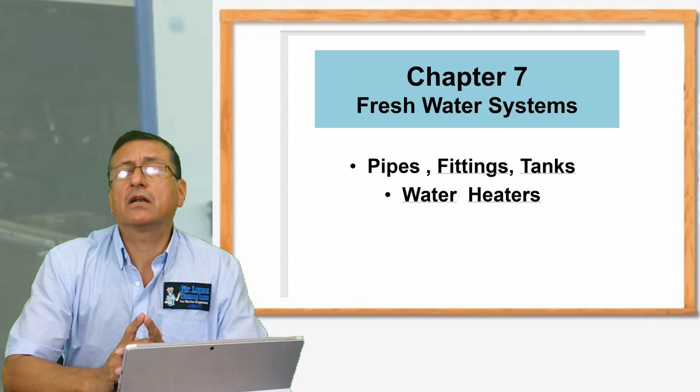Be careful with freshwater systems because people make a lot of mistakes in the installation. Normally people think this is pretty similar to residential home installations. It's similar, but it's not the same. We need special considerations, especially in relation to the quality of materials, the wiring, the bonding system, and the selection of materials appropriate for each specific situation. Take care, because the installation and the materials are completely different. Never use regular material, the material you use in your home installation.

Use always marine approved materials.

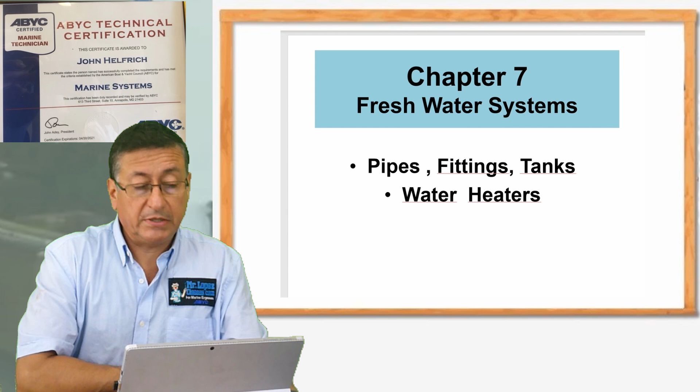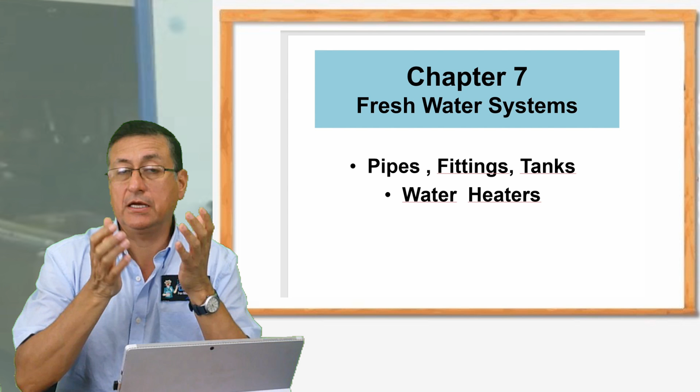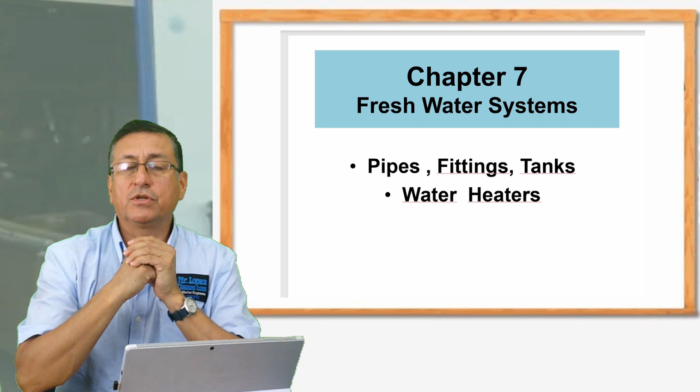My friends, in the installation of freshwater systems, it's common that people try to use materials meant for industrial and residential installations. Those materials are different. Be careful if you're working in a marina or shipyard, because you may receive a visit from the inspector, and suddenly he rejects your work for using improper materials. Always use recommended hoses, pipes, and clamps approved by the Coast Guard, ABYC, and the regulation in your country. In America, we follow ABYC. It's a good standard for installations of freshwater systems, sanitation systems, and all auxiliary systems.

Okay my friends, we are going to start with the pipes. The materials, once again, should be marine approved. The majority of pipes for freshwater systems, if metallic, are in a special bronze, marine bronze alloy, with fittings also in bronze alloys. If the lines are aluminum, it's aluminum series 5000, marine approved. If stainless steel, it's stainless steel series 300. Don't forget: series 300 for stainless steel, series 5000 for aluminum, and copper alloys only naval bronze and special bronze alloys allowed for marine applications.

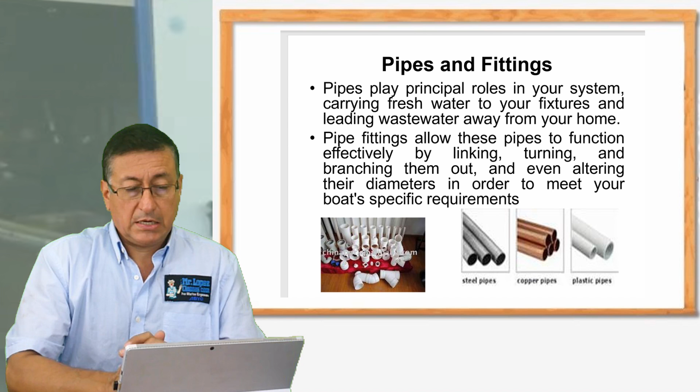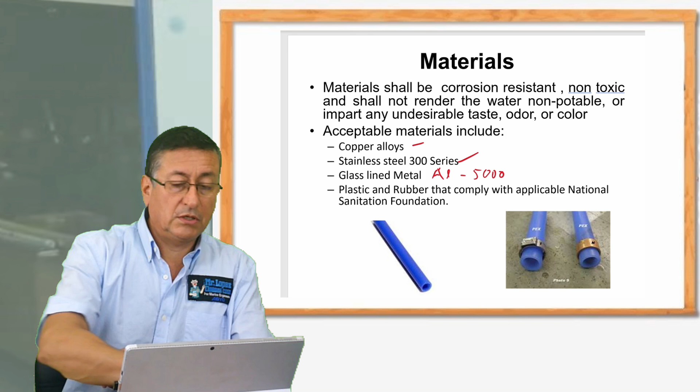Let me check the special materials once again: copper alloys, stainless steel series 300, aluminum 5000 series, and plastic and rubber according to the ABYC and Coast Guard regulations. That's critical, materials.

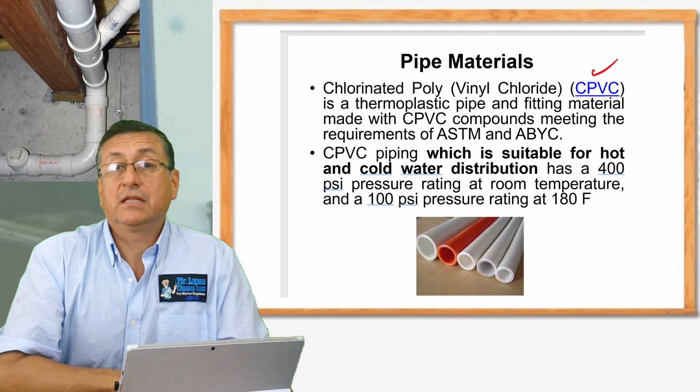CPVC is a good material, it's authorized, and those elements meet the requirements of ASTM and ABYC. That material is different than regular PVC. The regular industrial PVC is different from CPVC. It's chlorinated polyvinyl chloride, a special material approved by ABYC. CPVC piping is suitable for hot and cold water distribution, with a capacity of around 400 psi of pressure, and works in temperatures up to around 180 degrees Fahrenheit.

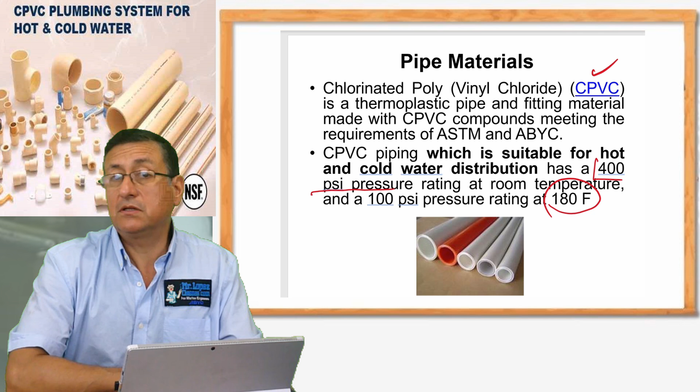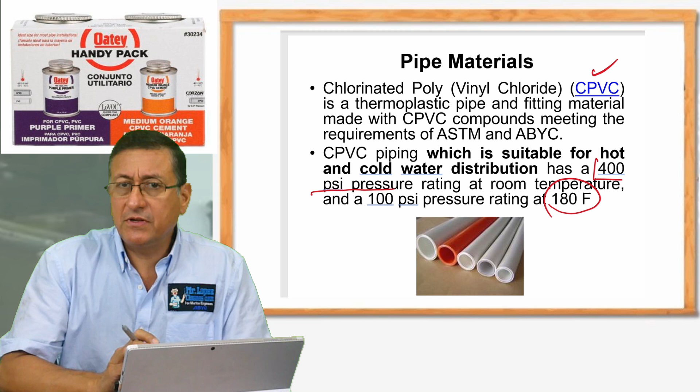CPVC should be installed with the special glue and the special cement for CPVC. It's simple, pretty similar to the residential application, but don't forget, regular PVC for residential application is not allowed in marine applications.

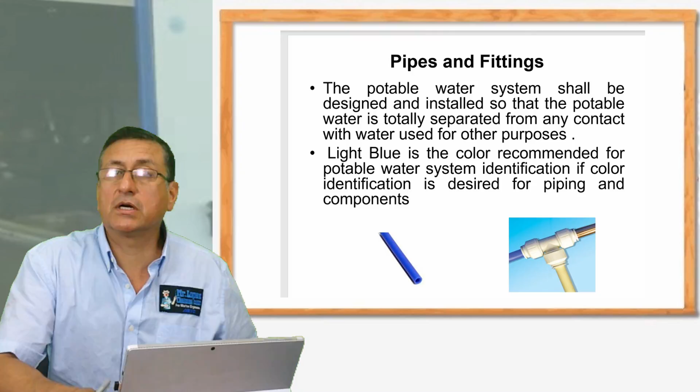My friends, the blue lines and the orange lines with quick connectors are commonly used, the most common in small and medium boats, in mega yachts and big boats. CPVC is more recommended, and copper permanent installation is better, but in medium and small boats, those lines, blue and red, red for hot water and blue for cold water, with quick connectors, are commonly used. In marine applications, glued pipes are not longer used because it's complicated.

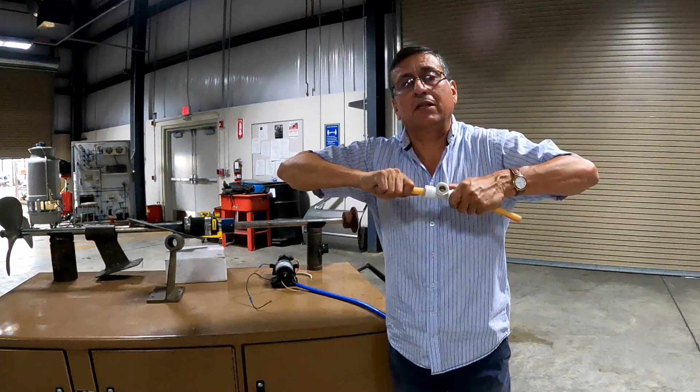In marine application, you have quick connectors. You release the pressure here, introduce the pipe, and the pipe is secured. Only if you release the pressure over there can you remove the pipe. You can use blue pipes for fresh cold water, and the orange or red one for hot water. Those are the connectors: straight connectors, elbows, or T's, with quick connections.

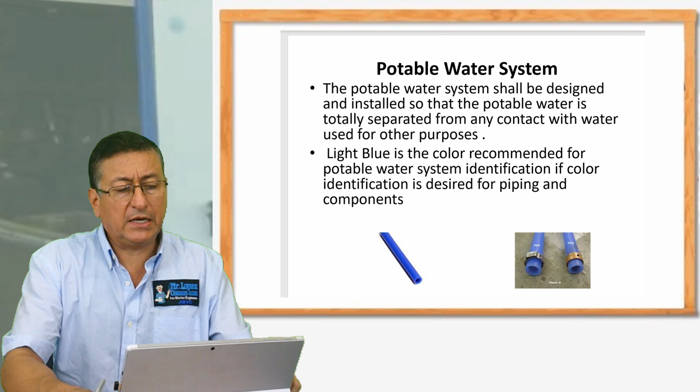It's easy to install the plumbing with this type of connectors. Those materials are allowed for fresh water, potable water, cold and hot water. We are going to start to analyze different types of hoses and pipes and the materials approved for marine application.

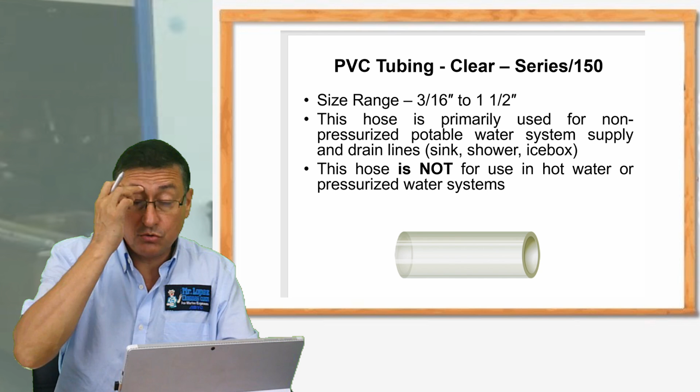The clear PVC tubing, this is the series 150. Those clear hoses are very common in marine applications, especially in drains - the drain of the air conditioner, the drain of the water maker. Those hoses are primarily used for non-pressurized systems.

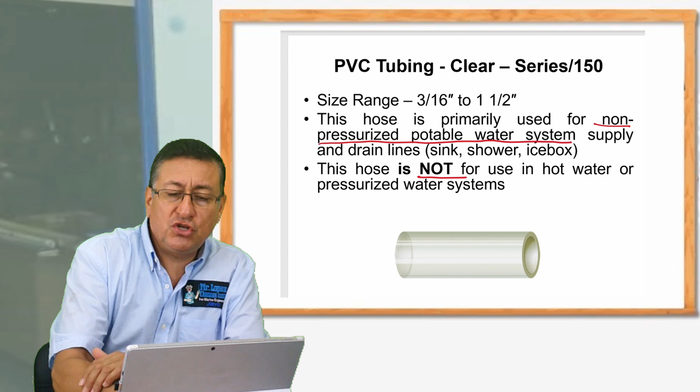Potable water system, or supply in sink, showers, icebox. This is not used for hot water pressurized systems - be careful with that. The clear hoses are basically for drains. I recommend using it exclusively for drains. It's good because you can see if the equipment is draining properly, and you can see if the drain water, the condensate water, the color is good. If the color is different, it's because it's mixed with the refrigerant or other components. Clear hoses are commonly used for non-pressurized systems and drain systems.

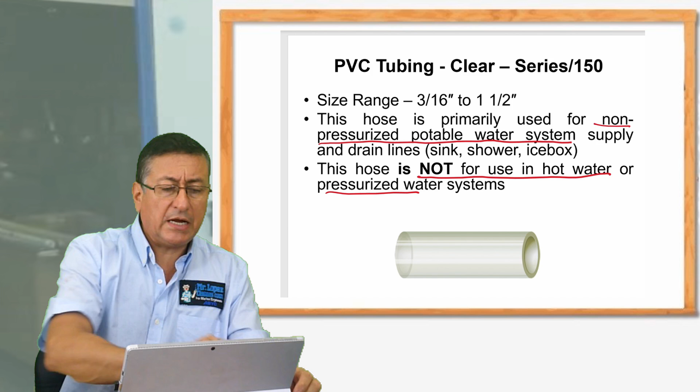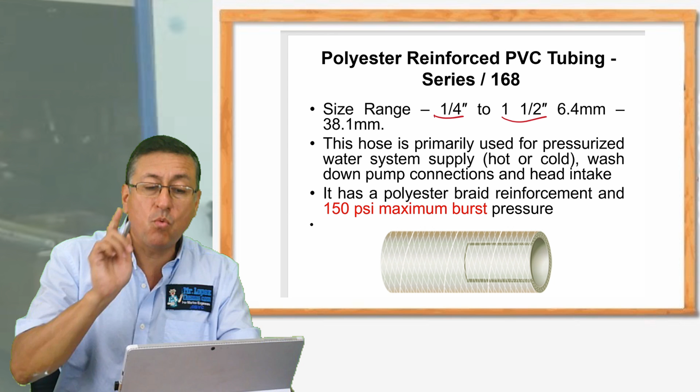This one is a polyester reinforced PVC tubing, series 168. This is clear with a white dash. The range is between quarter and 1.5 inches in diameter. This hose is primarily used for pressurized water systems, hot or cold, pressurized wash down pumps and head intake. The maximum pressure of this line is 150 maximum burst pressure.

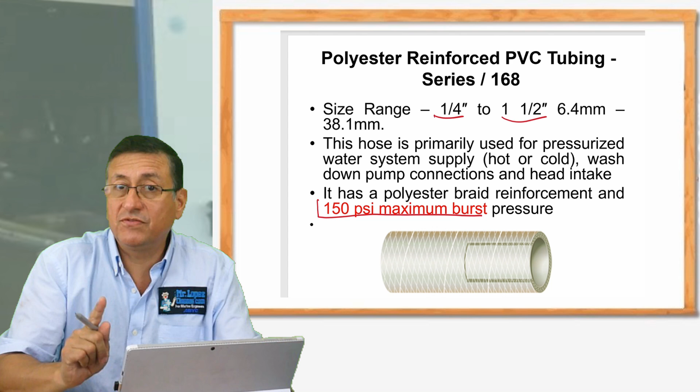This is clear with white lines, and the pressure for those hoses is maximum 150 psi. Maximum 150 - be careful with the pressures, if not you make a lot of mistakes.

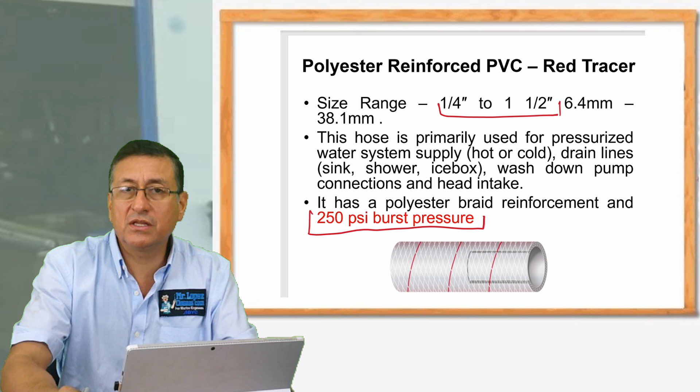And this one with the red lines works with a maximum 250 psi. This is the polyester PVC red tracer, and once again they come in between a quarter and one and a half inch in diameter. Those hoses are primarily used for pressurized water systems, hot or cold, drain lines, sink, shower, icebox, for example wash down pumps. It's a polyester braid reinforced line. This is clear, but it's reinforced and is used with maximum 250 psi of pressure, with the red line.

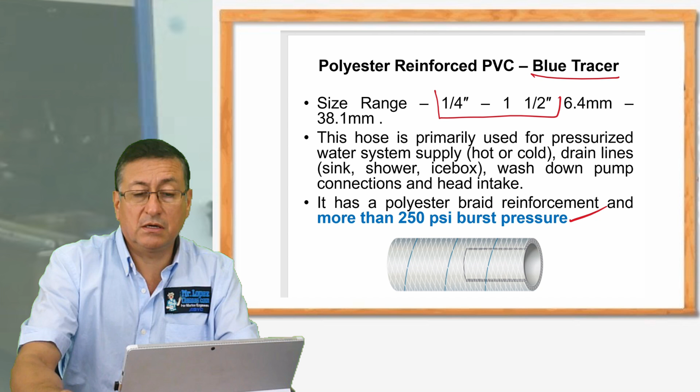With the blue line, like this, it's pretty similar, but this is blue tracer. Once again, quarter inch and 1.5 inch in diameter, and this is more than 250 psi. Once again, it's used for pressurized systems, hot and cold water, drain line, sink, shower, icebox, but with more than 250 psi. This is a little higher in pressure than the previous one with the red line.

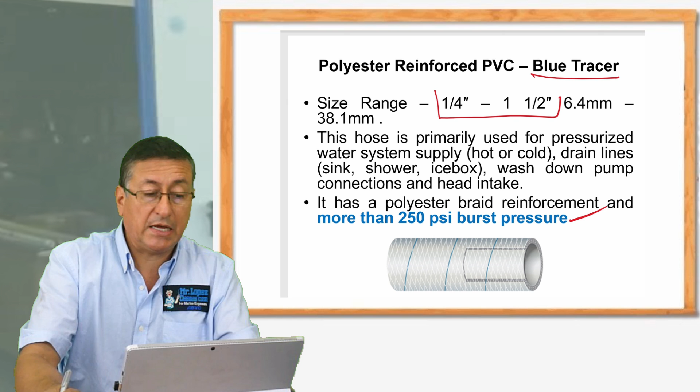And this one, the next one, this is completely white, thick wall and wire reinforced. This is Vac Extra Heavy Duty FDA, series 148. The range of diameter is between 5/8 to 1.5 inches. Those hoses are smooth, white color, FDA grade, PVC with a vinyl helix inside. It is rated for full vacuum. This is good in areas where you have high vacuum.

Those hoses don't collapse, and are resistant to mild chemicals, permeation, and salt water. This hose is primarily used for bilge pumps, intakes, and discharge. In the majority of bilge pumps, you find these white reinforced hoses. They are used in sinks, showers, scuppers, live wells, intake, drain, potable water, tank fill, sanitation systems, in toilets, in tank drain lines. This hose is resistant to odor permeation, so it's commonly used in sanitation systems.

Do not use that hose with refrigerant, automotive refrigerant, coolant, or glycol-based antifreeze. Never use those hoses with antifreeze, the automotive antifreeze, because automotive coolant has a special chemical detergent that deteriorates the material of those hoses, and sooner or later you'll have a leak. Be careful - this is the only fluid that is not compatible with this type of hose, the automotive glycol, automotive antifreeze. Be careful with that.

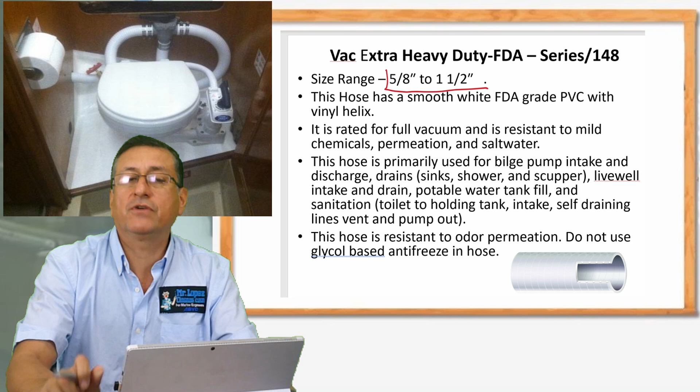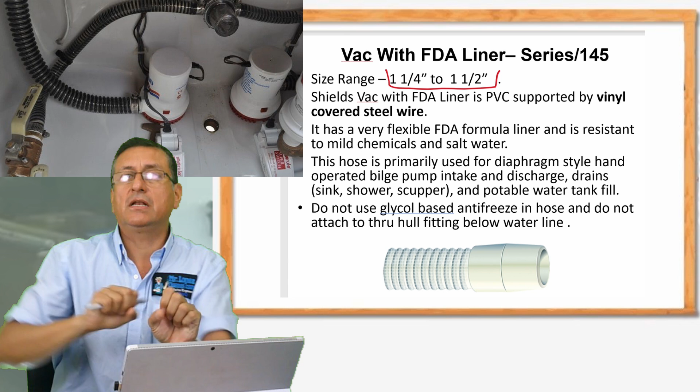It's used also in bilge pumps. It is very flexible, FDA, and is resistant to chemicals and salt water. This hose is primarily used in diaphragm, hand-operated bilge pumps, in the intake and discharge lines, and is used in the fill of a freshwater tank. Once again, don't use it with automotive antifreeze, because it's not good. And do not attach it to through-hulls located below the water line.

Be careful with those flexible hoses. They should never be attached directly to the through-hulls, because immediately you'll have a complaint. Be careful with that - never attach those hoses directly to the through-hulls.

One important thing before I continue: don't forget about the hose clamps. The hose clamp should be marine approved, series 300, and installed as double hose clamps, crossed, one in one direction, the other in the opposite direction. All installation should use double hose clamps.

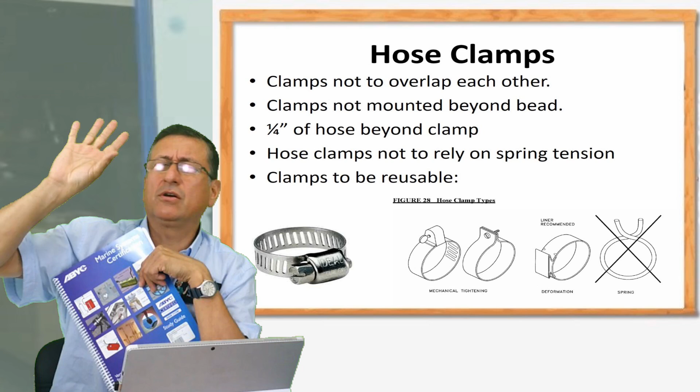In the next chapter dedicated to air conditioning, we'll talk about how some manufacturers of air conditioning equipment accept single hose clamps, but ABYC and I always recommend double hose clamps for safety. I think in the ABYC study guide they mention exceptions - only in fields of fresh water can you use a single hose clamp. I don't remember exactly, we'll check. But the recommendation is in all the feeds, all the terminals, use double hose clamps.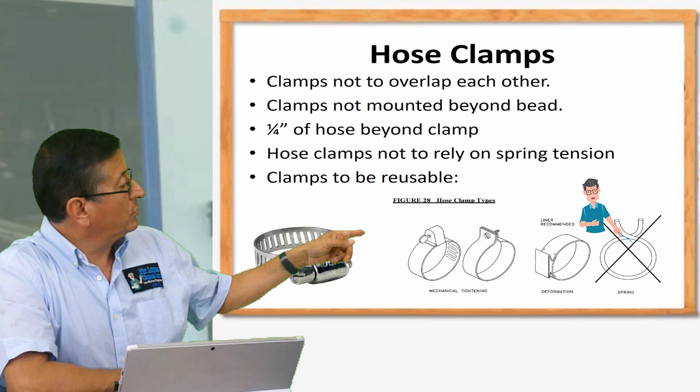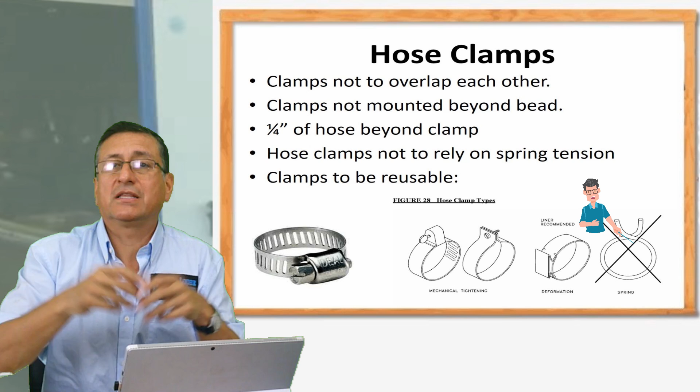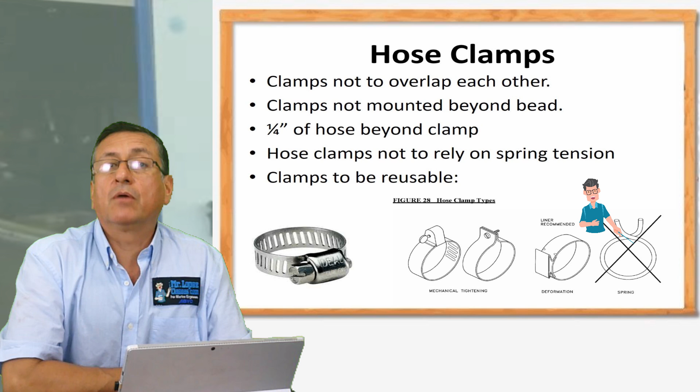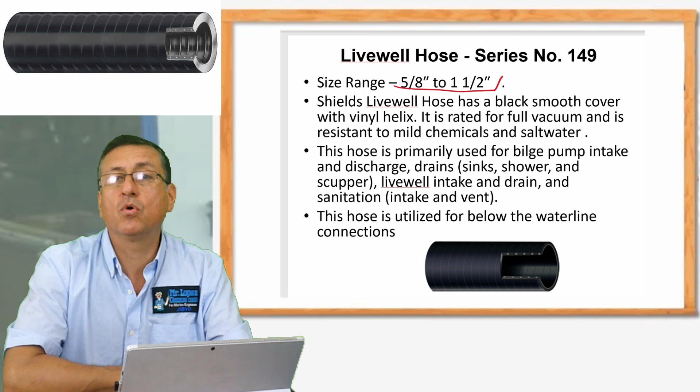The next hose, live well hose, series 149. The range is between 5/8 inch to 1.5 inches. This live well hose has a black smooth cover, is wire reinforced, rated for full vacuum, and resistant to chemicals and salt water. This hose is primarily used for bilge pumps, intake and discharge, for drains, sinks, showers, scuppers, live wells, and sanitation systems. In sanitation systems it's very common, especially in the discharge lines. This hose is used for installation below the water line, because being wire reinforced, it never collapses under vacuum. It's a very common hose used in those types of applications.

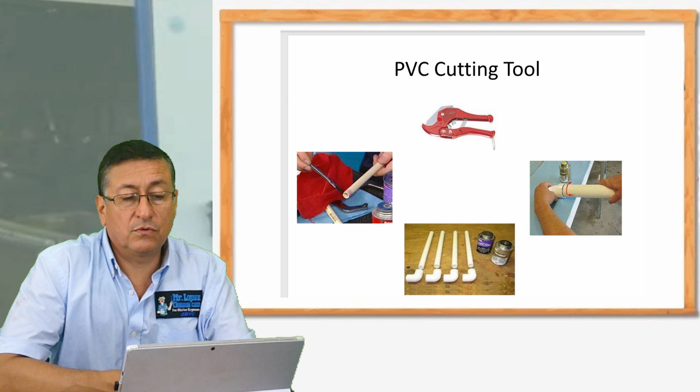Okay, my friends, and don't forget, if you work with CPVC, try to use the special cutting tool for CPVC, and use the glue and cleaner special for those PVC pipes. You have experience in your home when you replace lines.

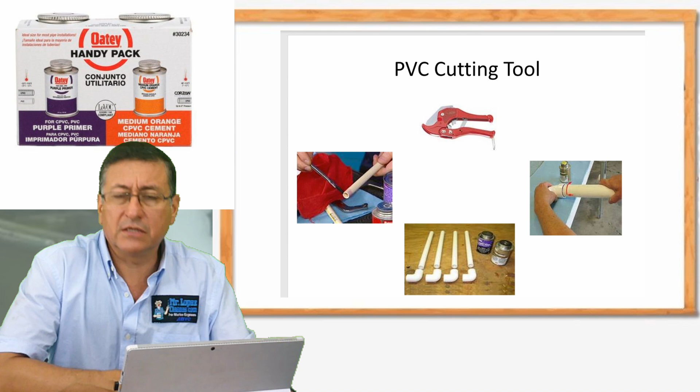Yes, CPVC is authorized. All right, remember we explained that the on-demand pumps, freshwater pumps, use a pressure regulator, which is incorporated. If the pump is DC, it's this one, the blue one. If the pump is AC, it's the last one. With the two screws, this screw is used to calibrate the pressure, for pressure calibration, normally located on the output side of the pump. With that screw you can calibrate at what pressure you want the pump to start automatically. Those are the pressure regulators or pressure switches.

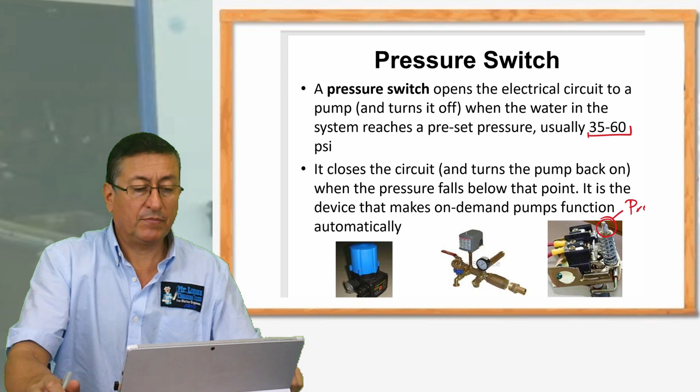A pressure switch opens the electrical circuit of the pump, and those pressure switches are normally calibrated between 35 and 60 psi.

Another important element commonly installed in marine applications is the water heater. The water heater in marine applications works with dual function - electrical power coming from the AC panel, and coolant coming from the main engines or generators. The idea is that the coolant enters a special serpentine coil and returns to the engine, but that serpentine is submerged internally in the fresh water, keeping the fresh water hot. It's a good choice because you don't use electricity. The majority of sailboats have those freshwater tanks with electricity and the option of an internal coolant core.

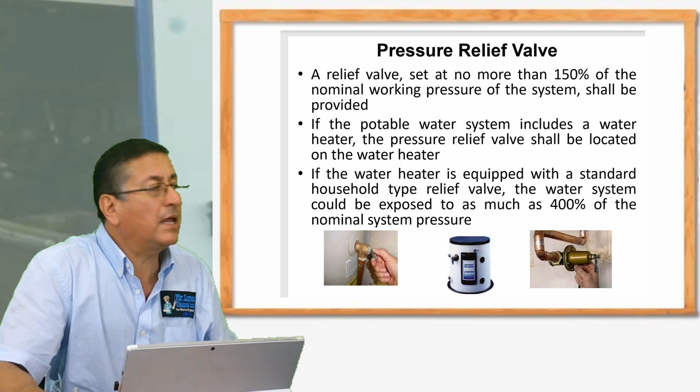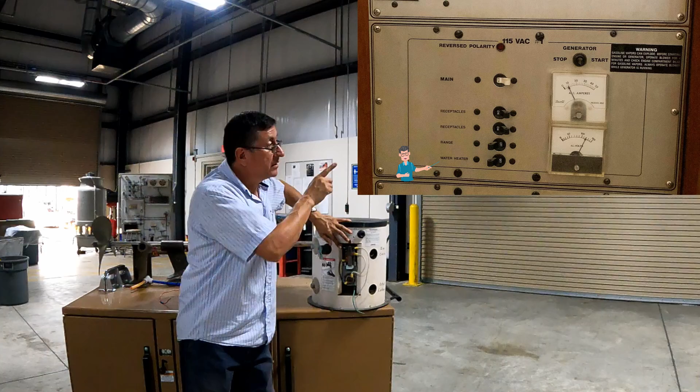Those tanks, those water heaters, are installed in this way. A marine water heater or boiler is a special water heater working with two functions: with electrical power - that's neutral, hot line and hot line, double phase, and ground - coming from the breaker on the AC panel. That breaker is labeled water heater.

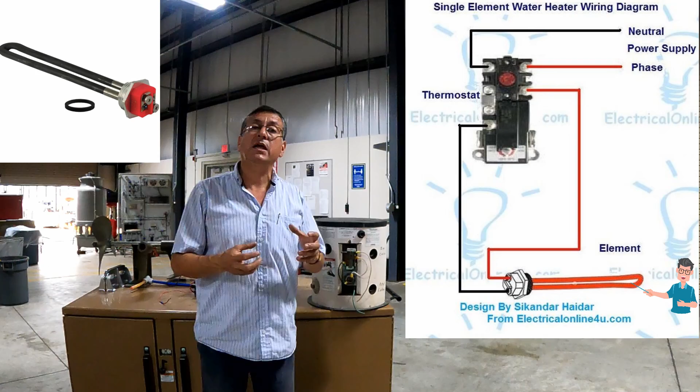This element activates a resistor exactly like this. That resistor is located inside of this cylinder in order to preheat and boil the water. This is the electrical mode of the water heater, when this electrical connection activates the resistor internally and preheats the water. But if you are in the middle of the ocean, you don't have a generator, you don't have an AC source of power.

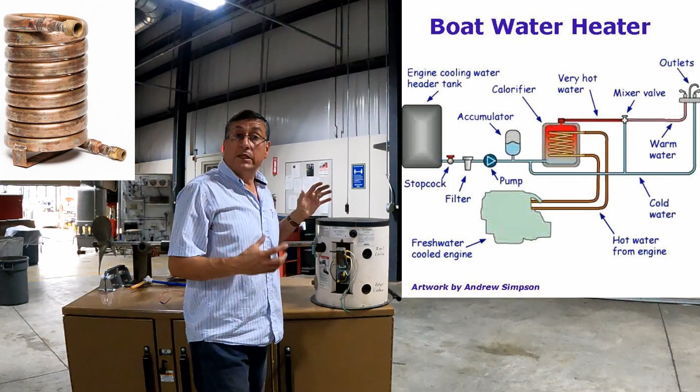The water internally in the cylinder, in the water heater, can be heated by coolant. It's a serpentine like this, located inside of the cylinder, and that serpentine is the input of the coolant coming from the coolant pump of the main engine, and this is the return into the block of the engine. That's the input of coolant, and this is the return of coolant. The coolant is coming hot because the engine is running. The coolant hot enters the serpentine of copper, nickel-copper alloy, and the water is preheated.

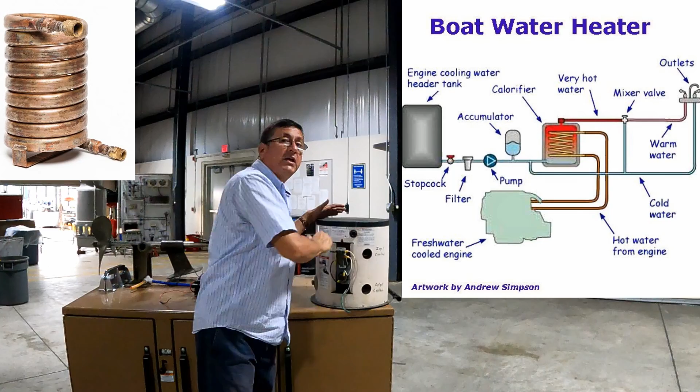In other words, this is the water heater for a marine application. It's a dual function, with electricity, electrical, double phase or three phase, or with coolant. And this is the output.

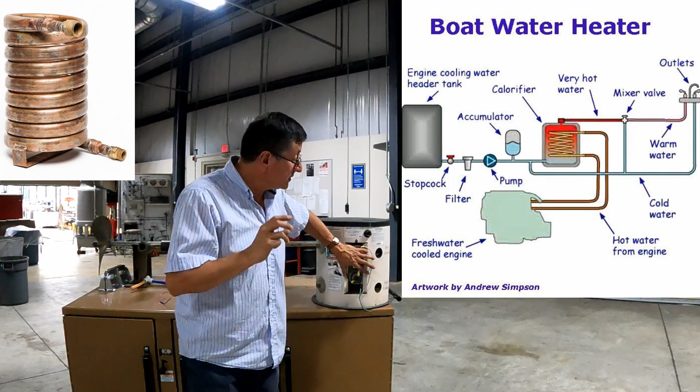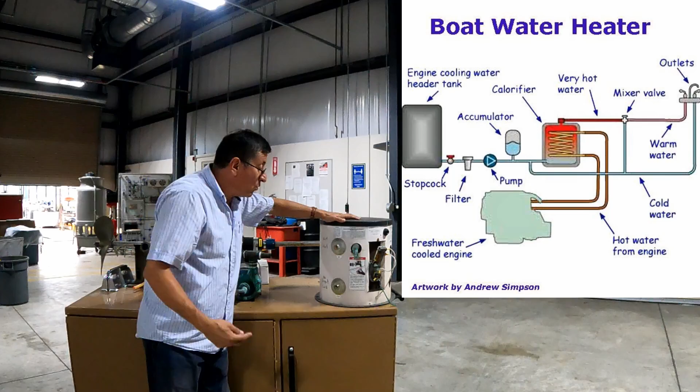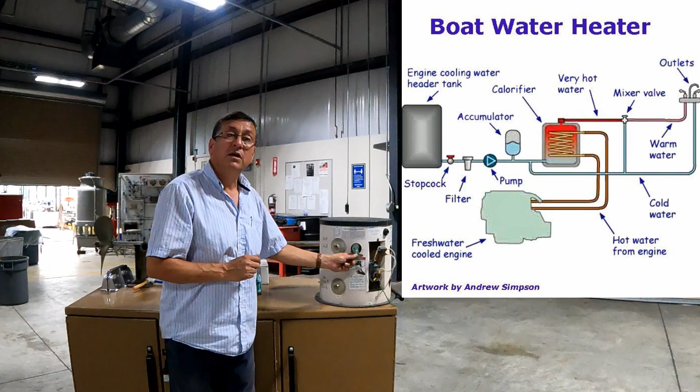This is the output. This is the fresh water coming in, cold water, and this is the hot water coming out. This is the water coming with the blue pipe, and this is the water coming out with the red pipe. This is the input and output, and this is the pressure relief valve. If the pressure internally passes the limit, that element, the pressure relief valve, opens and releases pressure, discharging the pressure and protecting the boat.

This is the water heater or boiler.

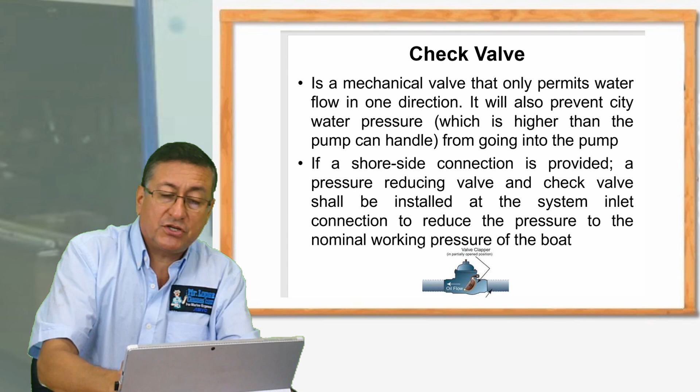Don't forget, my friends, that we are going to use a lot of check valves. The check valves are used to avoid that the water returns, but it's very, very common. We are going to use check valves in different applications. Be careful when you install the check valve, because the check valve only has one direction, the direction where the window opens and closes. If you install the check valve in the opposite direction, you make a big mistake.

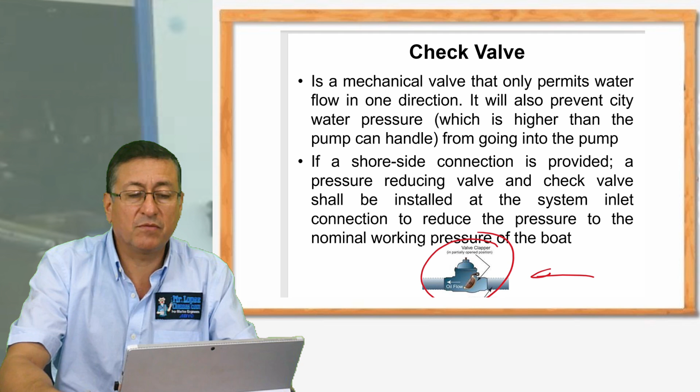It's a check valve that only allows the flow of the water in one direction, exactly the same like a diode in electricity, and prevents that the pressure of the water coming from the city damages other elements inside of the boat. Remember that picture? Exactly. The check valve over there is mandatory, in a typical freshwater installation of medium, small boats, and big boats.

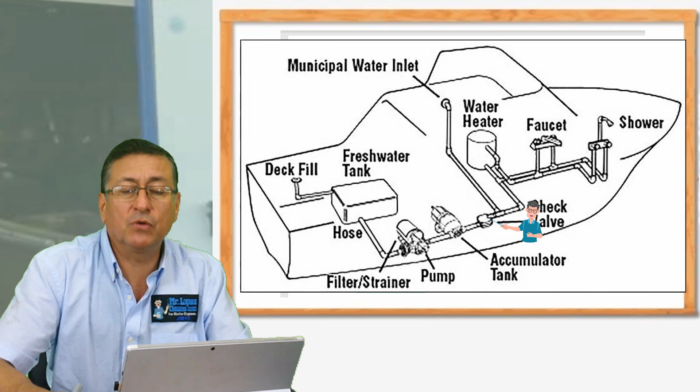The freshwater tank materials, this is a special polyethylene plastic. I prefer to use the rigid polyethylene plastic. The white color is better, and you find those types of tanks in different sizes depending on the area that you have in your boat.

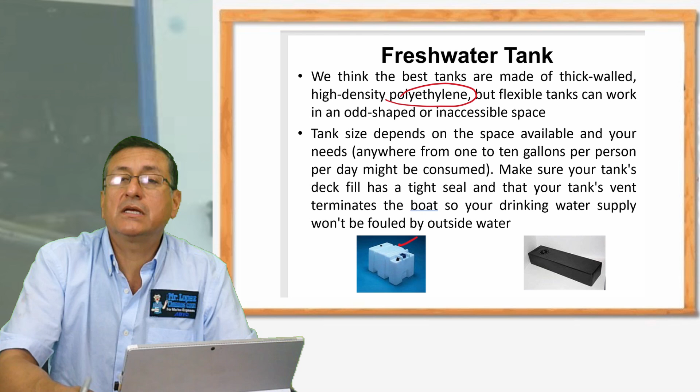Don't forget, use only freshwater tanks that are marine approved. There are plastic freshwater tanks used in industrial applications. Those plastic freshwater tanks are not allowed to be used in marine applications. Be careful with that. The size of the tank depends on the capacity of your freshwater system, the amount of faucets, and the area that you have in your boat. In some cases, you have special areas and you need to order the fabrication of those tanks. There are companies dedicated to fabricating those plastic tanks specially according to the area that you have in your boat.

All right, and the accumulator. We'll talk later about those accumulators. Those accumulators work with pressures between 30 psi and a maximum of 125 psi.

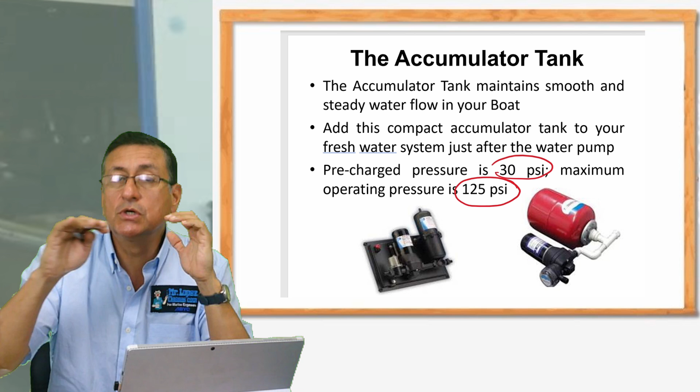ABYC question: the accumulator tank maintains a smooth and steady water flow. I explained it's like a shock absorber, absorbing vibration, and keeping the flow of the water smooth with no noise and no vibration.

And the water heater, I explained to you in the previous video, that works with electrical or works with the coolant. Okay, my friend, this is the theory related to the lines, the pipes, and the water heaters.

Don't forget, be careful with the electrical connections. Be careful with the bonding. If you install a freshwater heater, you need to bond the water heater to the bonding system, and you need to ground the electrical connection of the water heater to the ground AC system, to the ground bus bar of the AC system. The majority of the water heaters are double phase.

For that reason, you need to be careful with the installation. Be 100% sure that you have two different phases. Not like some technicians say, 'No, I have a single phase, I split the phase in two, and right now I have a double phase.' No, this is the same phase. Okay, you need a double phase to install those water heaters.

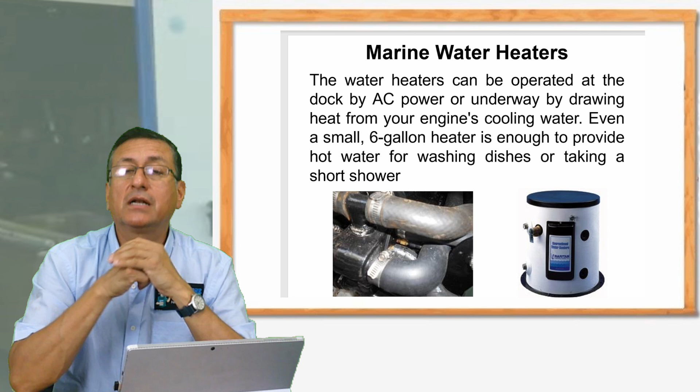Be careful with the electrical installation. Be careful with the ground, and be careful with the bonding. The ground is connected to the ground bus bar of the AC panel, and the bonding is connected directly to the bonding system to drain small DC currents.

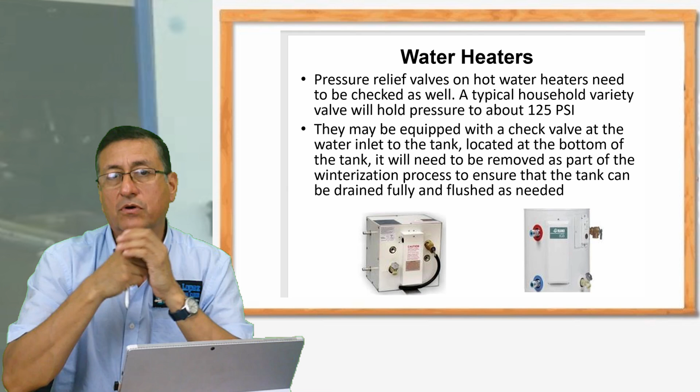Use water heaters recommended for marine application, because those water heaters have a double function for coolant and electrical, and they are fabricated in materials approved by the Coast Guard, approved for FDA, and approved for ABYC. Thank you.